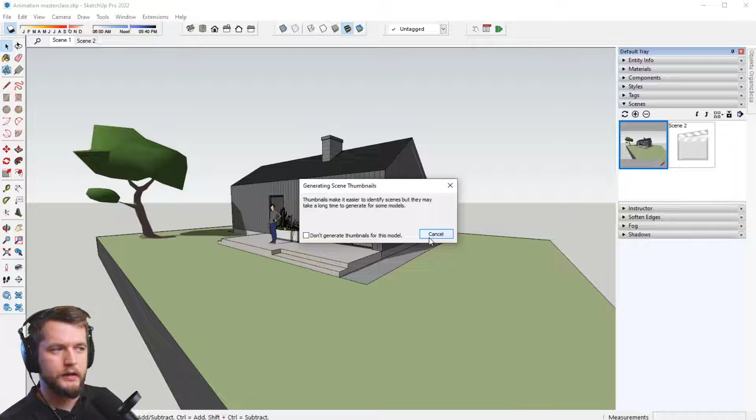What I could also do is change how I see the scenes in this window. By default, you probably should see them as thumbnails, large ones or smaller ones, where it has to update thumbnails. There's also an option to choose smaller thumbnail, detailed view where I can see the scene name as well as the image itself, and also a list view. I prefer this view because it's easier for me to create the scenes and manage them when I don't have to wait every time for the thumbnail to update. But if it's easier for you to understand visually what's inside each scene, then it's better to leave it as a thumbnail.

I'm going to go ahead and create the third scene as well, and let's see they work well. For instance, if I wanted to create a presentation directly inside SketchUp, I could press on scene 1 with right click, and you'll see there's an option play animation. By pressing it, there's going to be a 1 second delay, and then I'm jumping to the next view. At any moment, I can simply press enter or space to pause the animation, and press again to resume it.

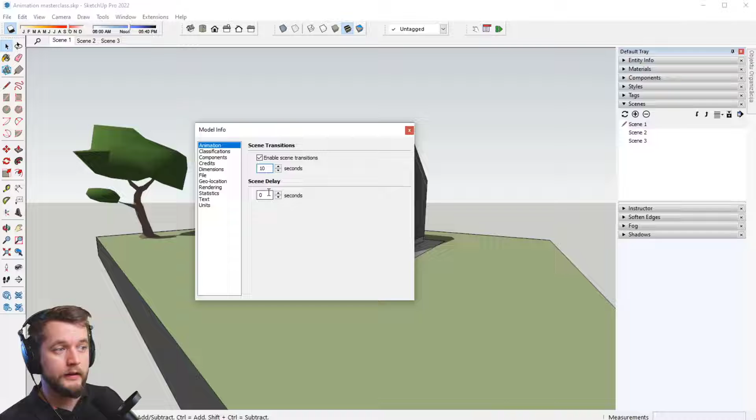To change the timing of the transition between scenes and the delay, you simply go to Window, Model Info, and in the first section, Animation, you'll see these two options. For instance, if I turned off Scene Delay, I wouldn't have delay at all, and I could change the scene transition to, say, 10 seconds. Now if I play the animation, at first you're going to have to wait these 10 seconds to go to the first scene, and then it should start. So now the presentation is a lot slower, not so erratic, and it's easier to view everything in the model.

One problem with presenting directly from SketchUp is that as my model is complex enough, I can't see the shadows while orbiting, because SketchUp usually degrades the visual quality of these stylistic effects so it's easier to model. But for presentation, it's a problem because I want these shadows.

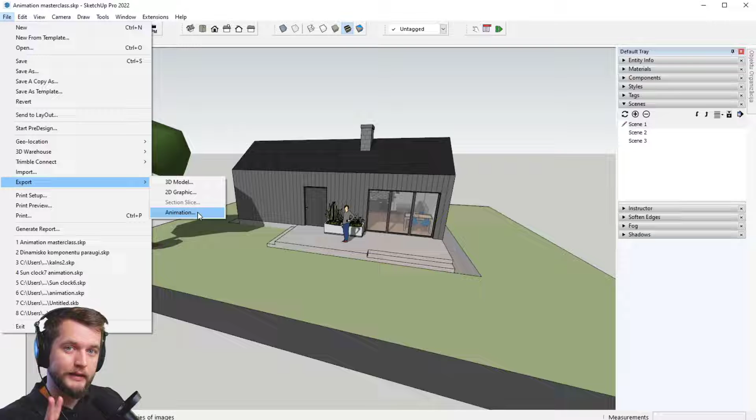So the best thing you could do is save this as an animation by going to File, Export, and choosing Animation. If you have at least 2 scenes, you'll have this option available. I can choose where to save it, and my only option for video is MP4 format, then choose options to decide the settings.

For instance, I can choose Full HD with this aspect ratio, and there's another option for scale multiply. It's how thick all the lines or text in your drawing are going to be, and 30 frames per second. This would be kind of a standard animation, basically as big as my screen is.

I can actually preview it by pressing on preview frame size, and it's gonna appear like that. Also for different sizes, you could just choose 720p, or custom if you wanted to write in, for instance, 4K quality animations.

But for the competition itself, it's enough to choose Full HD, and these seconds could be okay. There's also an option to loop to starting scene, meaning that from the last scene, the view returns to the first one, so you could loop the animation without an interruption at the end.

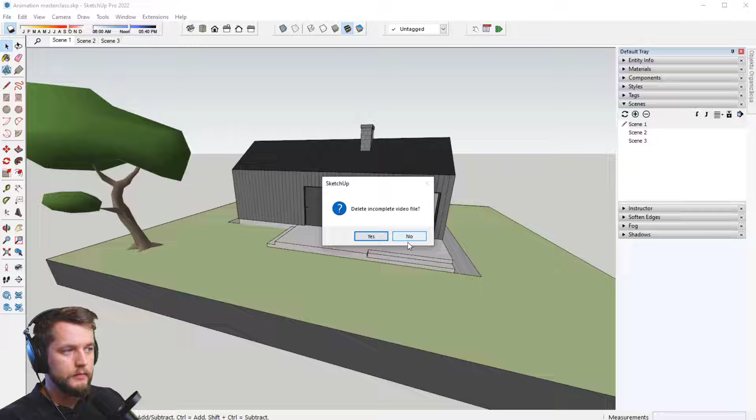I'm going to close this export window for now. A few tips at least for these simple camera animations: it's usually best to follow some rules that also apply for architectural video taking and drone photography, which is that you need to keep the animation's movement as simple as possible, so you could better focus on the objects themselves.

First I'm going to change the transition time to something like 3 seconds again. What I mean about simplifying the animation is, for instance, I could have a view where my camera is looking directly at this facade, and I could simply move from one side to the other. One problem is that simply by creating scenes, I won't be able to have them at the same height from this base.

So when you want to create more interesting animations, you will have to draw some extra lines for them. I'm going to take the line tool and draw a line from this corner up at a height of 1700 millimeters, and the same at other corners of the base as well. Also change the field of view by selecting the zoom tool to, I'd say, 60 degrees.

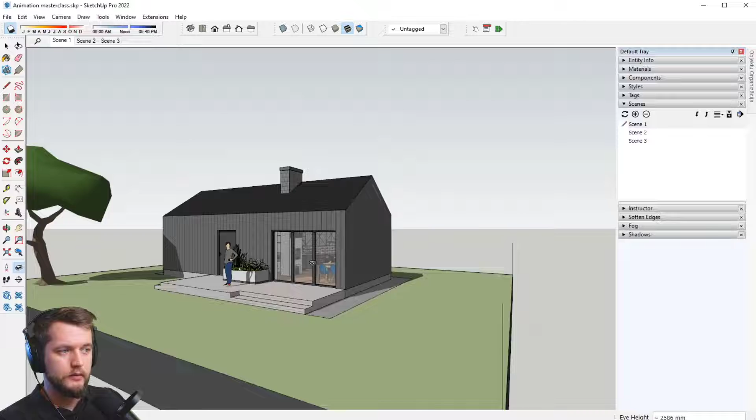And I'm going to create the first view. That's done by using the position camera tool. The trick is I must not simply click somewhere on the base, but use this tool and create this drag motion from this endpoint to this one. With this line, I'm drawing the view I want, the camera position and the camera target. Now I'm simply going to update the first scene like this.

For the second one, I'll do the same: choosing position camera, drawing this line, and updating scene 2. So what I get out of it is that I can press from scene 1 to scene 2, and I get this very precise movement from left to right.

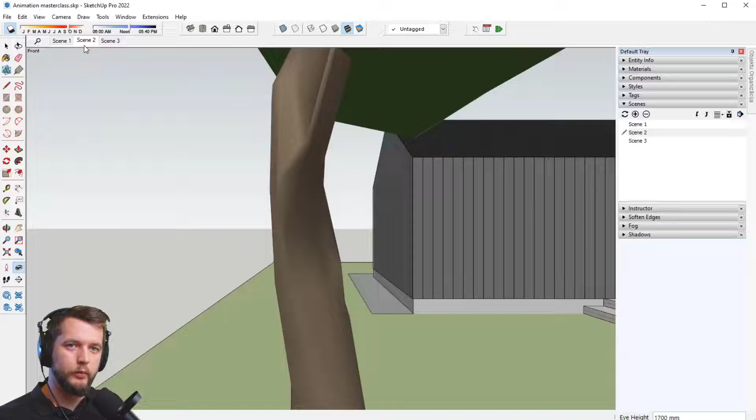Another option would be to create this movement diagonally. Choose position camera again, this time drawing a diagonal line, and I'm going to update scene 3.

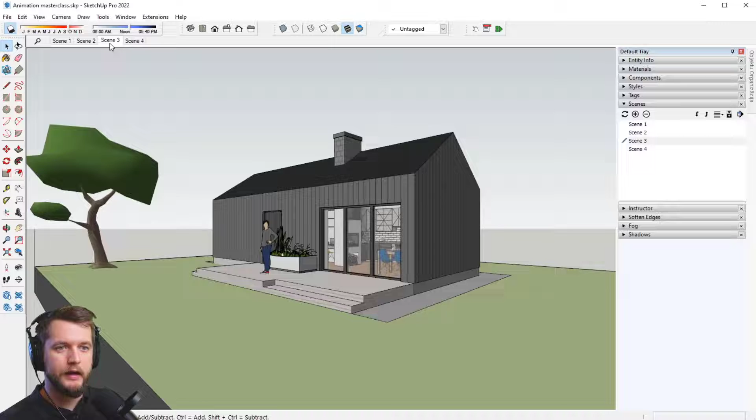I'm at that scene, and I'm going to create another one from the opposite side, from here to here, and create it as scene number 4. To check what I got out of it, going from 4 to 3, I have this precise rotational movement around my house. The good thing is that with this I also get a precise 2-point perspective, which compositionally just looks better as well.

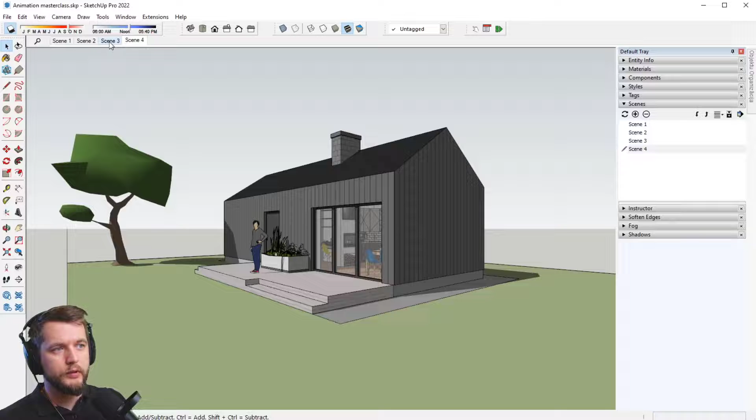That's the main idea, I guess. When creating these combined videos, it would simply be to exclude the part that is from scene 2 to scene 3. You can simply cut that out and combine the scenes together later on.

One extra thing: I could, if wanted, start excluding some scenes from the animation as well. In the scenes dialog window, I can turn on extra details, and for instance, if I wanted to create simply an animation from scene 1 to scene 2, you'll see that for each of the scenes, I can turn off this checkbox, include in animation.

All right, if I would try to save a quick animation now, I'll reduce the resolution and leave it at 30 frames per second.

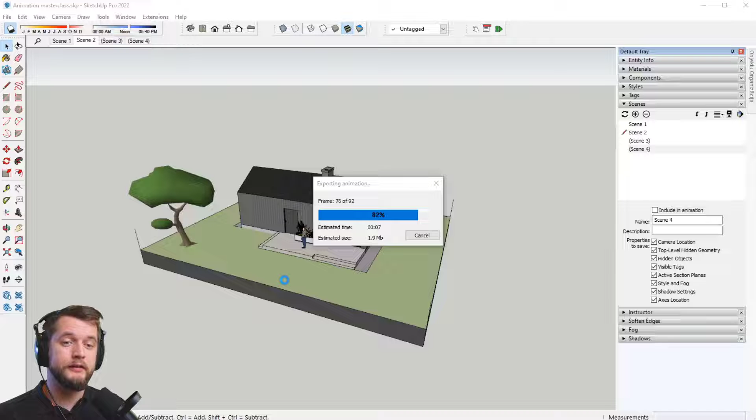If you're exporting very high quality animations, it might actually take an hour. For instance, for 4K quality image videos, each frame is basically a separate image, so it might take a second or a few to actually render.

So if I check this animation now, it's quite too fast, but at least I can see all the detail. Also, the shadows didn't disappear. I could now change the frame rate and the animation time to say 10 seconds, and it should look okay.

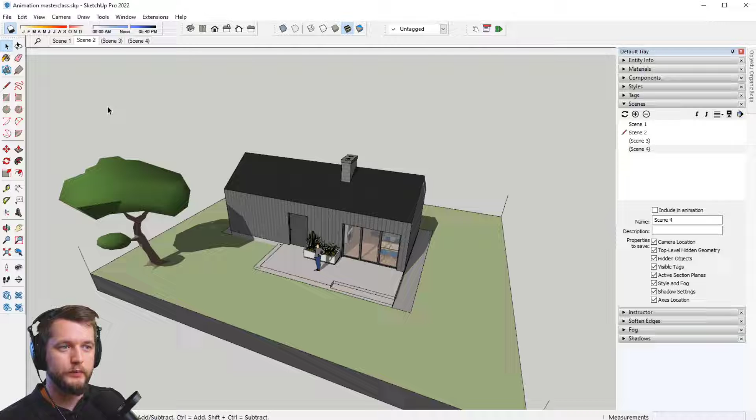So just keep the animation simple, moving in one axis at a time, or limiting the movement to rotation, for instance from left to right, or up to down, or maybe in two axes. You have to have a precise center point where you're pointing at, always for the camera target.

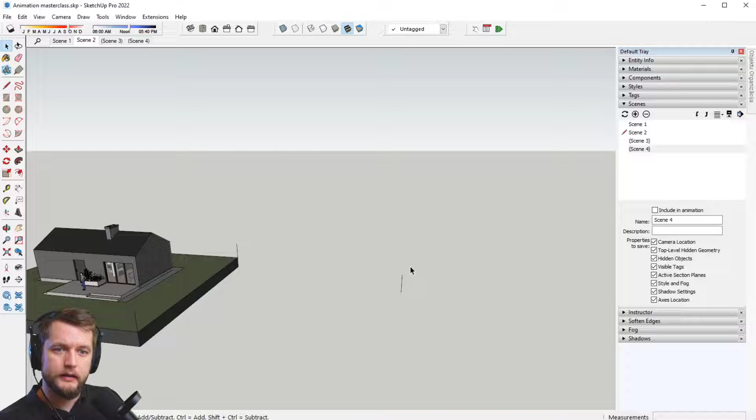For animations that need a bit more precision, like this rotation around an object, it would be useful to draw one line. That's going to be the center line, let me draw it straight up. Then I could draw another, and using the rotate tool, I'm going to rotate it, say to 60 degrees, and press 5x to copy it around.

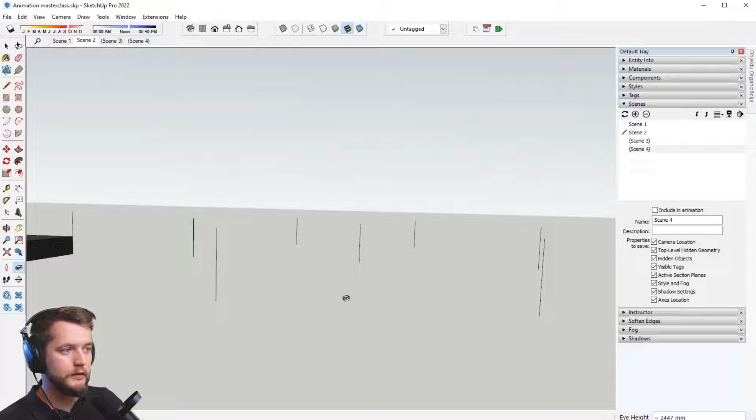So for at least for my experiments, 6 is optimal to get this perfect motion around an object. Each scene would simply be set with the target pointing towards the center. And I could even angle it if the camera is too close to the object, to get a better view as well.

All right, that's kind of for basic animations, but you'll see that there are other things included that we can animate with the scenes. So I'm gonna revert the file to its beginnings.

And now we're gonna see the power of SketchUp scenes. Why it's quite often used in many architectural project presentations, as the project itself might often be constructed in SketchUp, in Revit, in AutoCAD, and other software, but quite often SketchUp is the place where it is presented, just because of these fantastic scene animation tools.

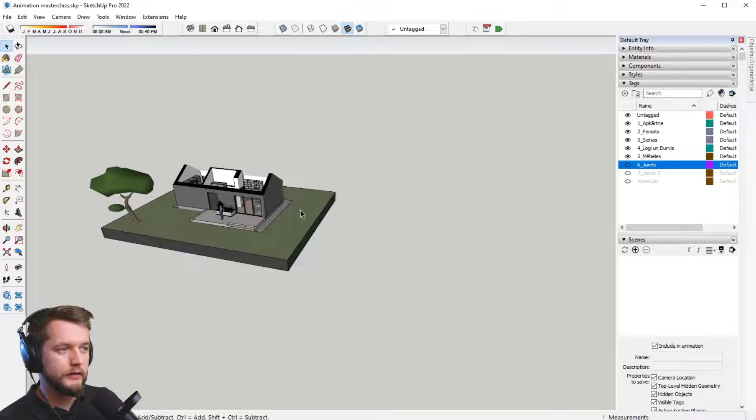So, for instance, if I wanted to first show a few variants of the model, or turn off some elements from my SketchUp model, what I have to do is have the tags dialog window active, and also scenes. I'm simply gonna move it up so I can clearly see all these things, and now isolate a bit what kind of elements I'm gonna animate with scenes.

For the first four, where we had this basic camera animation, we had basically everything turned on. But right now, the only thing I need is to see the visible tags.

So, for instance, this view where I have basically everything visible, I can save it as a scene, and I can now at least name it as well. I'm gonna name it where I can see full model.

And for the next one, I'm gonna simply turn off the roof tag, instantly create another scene, and call it without roof.

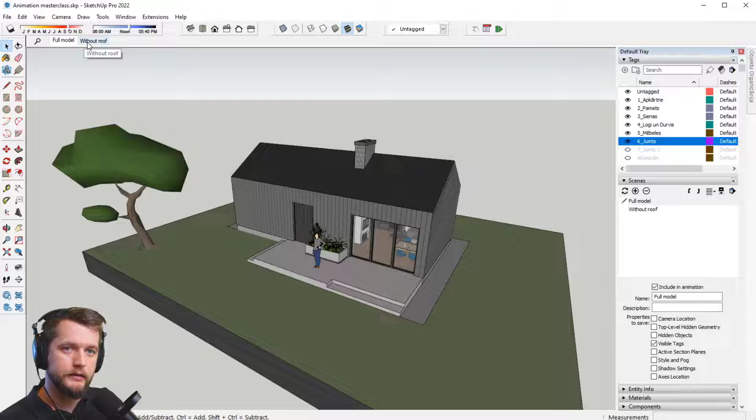And check how it works. So simply by clicking, I can change how the model is gonna behave.

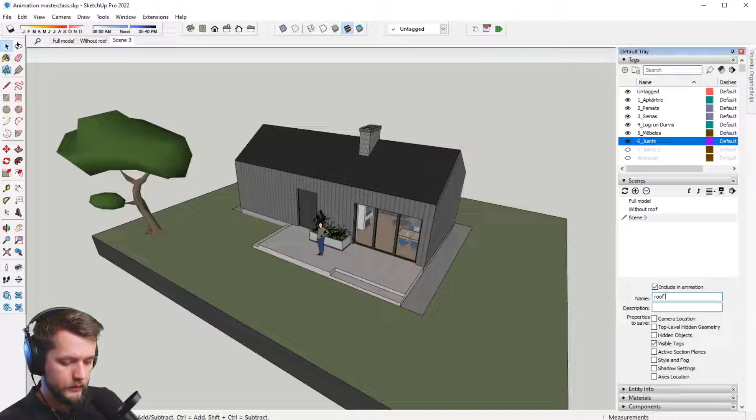So I can also show, for instance, two variants of my design. I'm gonna turn the roof on, save it as another scene, roof version 1, and then we're gonna turn it off, turn on another tag, have a second version of this roof, and save it as a new scene, roof version 2. Right now, simply by clicking on the appropriate scenes, I can change between two variants.

And also, it's very helpful, for instance, if you're presenting from devices like your smartphone or iPad. You don't have to open any of these tags or extra windows, you have just one button that can instantly change your model.

And also, it's useful when sending presentation models to clients, right? When they don't actually have to know how to use any of SketchUp's modeling tools, they can simply check what's written there, or you can communicate with them even remotely, and you can be sure that what you set up with these scenes is precisely what people are going to see.

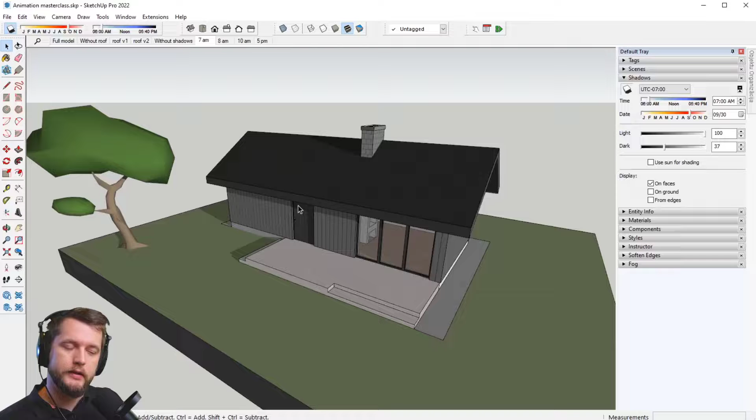For instance, if you save the shadow animation, good settings would be to choose animation, have it set to 3 seconds, and have a 1 second or maybe half a second delay. That would mean I could export the animation using just these shadow scenes, and you'd get a fantastic presentation of how the sundial actually works.

All right, that works okay. After that, I wanted to create another type of shadow scene animation. So I'm going to go into scenes, go to the last one, create a new scene, and exclude all check marks, because this one is going to change how my section planes work in the SketchUp model.

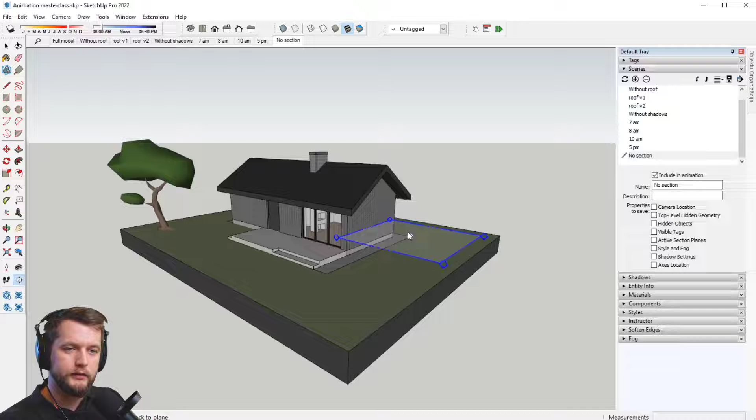The first one is going to be called 'no section,' and for a moment we're going to turn off the shadows. I'll create one section cut and place it horizontally, then move it to the necessary height.

Then I'll create the second section. It's going to be located like this for an elevation, and using the move tool, I'll move it like this. So I have two sections right now.

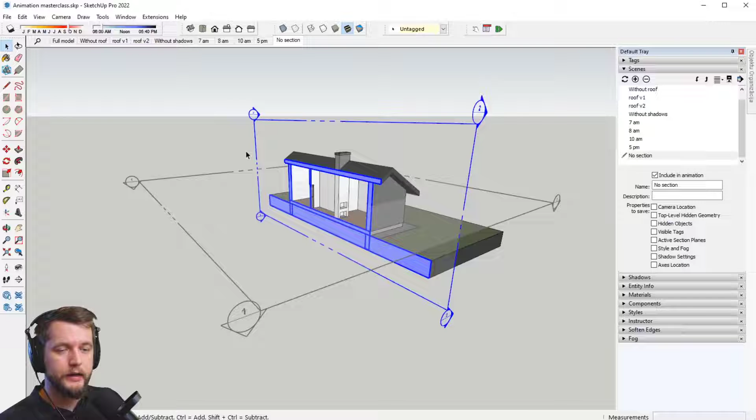To change which is active, I can simply double click on the necessary one. If I double click again on the one that's active, it turns off. So I could basically have three states: sections all not visible, one visible, or the other visible. In this instance, neither of them are visible.

So for this 'no section' scene, I'll turn on the check mark for active section planes. Then I'm going to turn on this section, create a new scene, and name it 'plan.' Then I'll turn on this one, create a new scene, and name it 'elevation.'

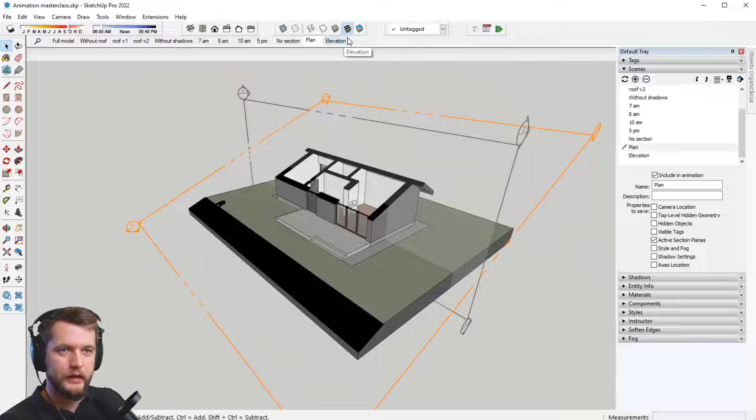I can check how they work now. By jumping from elevation to plan, you also see this very nice section animation. I'm going to go to view and turn off section planes so they won't appear. So every time I press on a given scene, the necessary section turns on in this smooth animation.

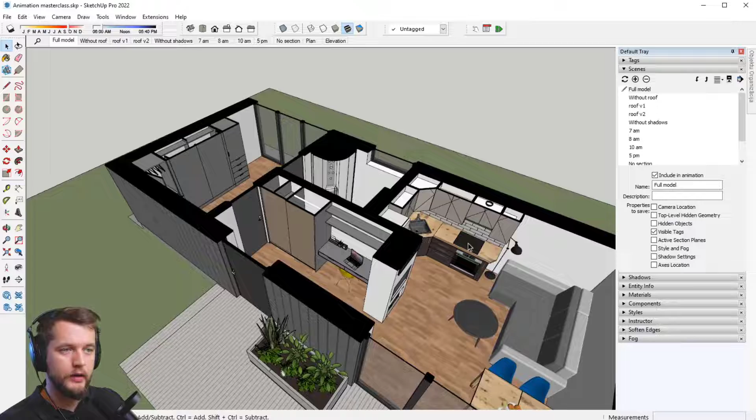For now, all these scenes are not connected. So, for instance, if I turn on the full model scene, I could see everything together. Or go to the elevation view, so I see all the furniture as well.

And I could go back, for instance, to no section, or go to roof variant 1. I don't have a special scene to just turn off furniture, but I'm gonna do this manually. So I can analyze this first design with this kind of roof, to see what the shadow animation looks like from 7 a.m. to 5 p.m. And then I could turn on the second roof variant, again manually turning off the furniture. I guess I could update the scenes simply.

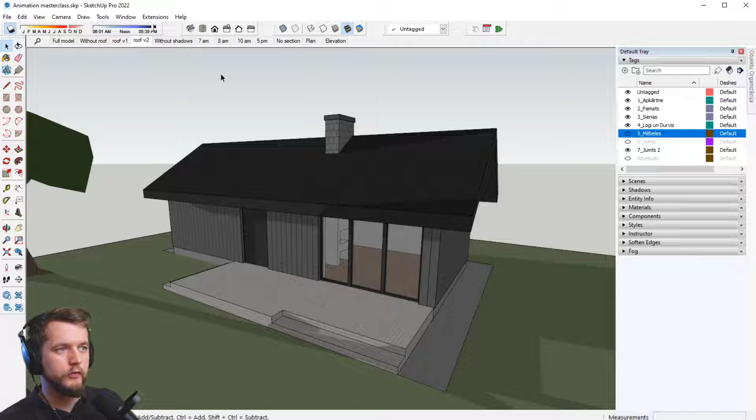Okay, it's gonna be better right now. Roof variant 2, and check the animation again. Sometimes you will have to turn the shadows on and off to get a smooth animation. But if you save it as a video, it should always be viewed in full quality.

So there are also other things you can change with scenes. When exporting as animation, you'll see there's hidden objects, also styles. Simply by going from one scene to another, you could change the style and location of axis, and what kind of geometry is hidden. But for most occasions, I only use camera, section planes, and shadow settings.

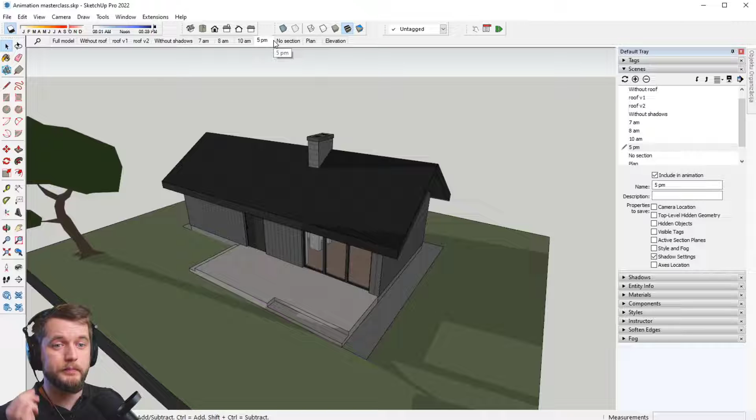You can see that this kind of magic is that I don't have to use any of the dialogues or these toolbars. I can change how the design is presented simply by pressing on these buttons. And this is one way how to animate with scenes. The second type of animation I wanted to show is how I can interactively present some design objects, and for that I'm going to revert to the beginning again.

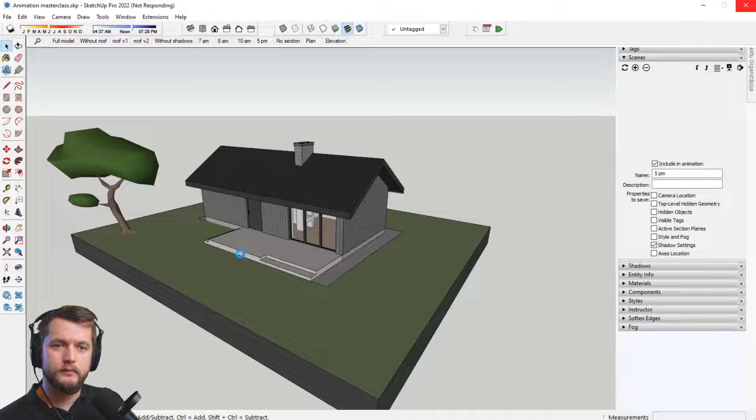Let me turn everything on again. All right, so all that I have open right now is a toolbar called Dynamic Components. You can turn it off by right clicking and turning off Dynamic Components.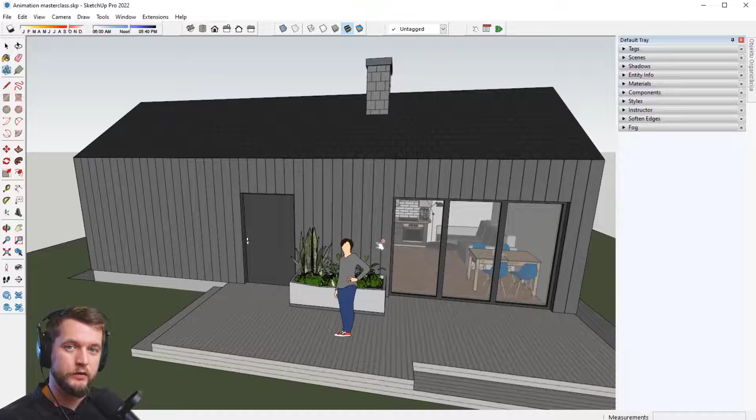What are they? The most useful feature, I guess, is for presentation purposes, where I can use this to press on an object, and for instance open the door, so it's gonna be easier for me to go inside. Then, for instance, I have a wardrobe, and I wanted to show what's inside of it.

Again, I can simply press on the door and show, for instance, this is the place where the shoes are going to be, and that door is animated as well. I can also change the position of some furniture, open drawers, or even change the size of objects from given dimensions.

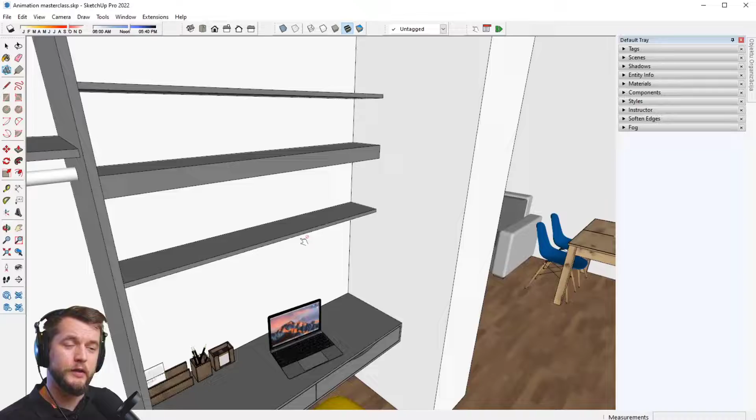Or, for instance, if I have to present how the couch could unfold, first I'm going to press here. I have a hidden feature that I can hide some objects, the pillows. Then I'm going to move this and rotate this part, and voila, I have an unfolded couch. I can press again to go back to the beginning.

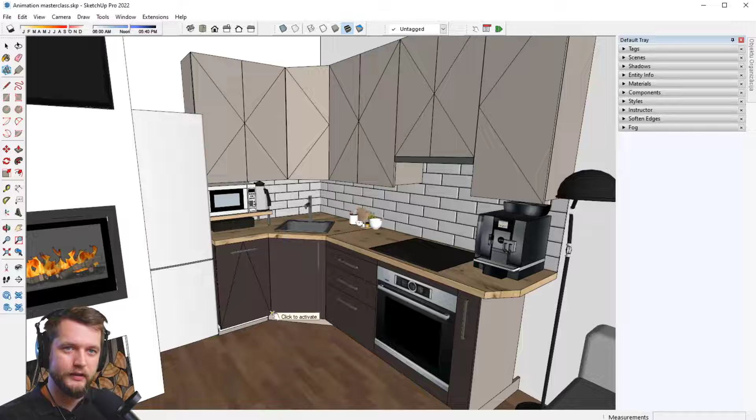It's also very useful for design of some furniture. I can show that here I'm going to have a dishwasher. I can show how I can open the cabinets, where everything is going to be hidden, and simply communicate better your ideas with the designer to clients using these dynamic component tools.

There are other options for parametric modeling and so on, but the basic idea for this class is to show how to create a simple animation for an object's position or its rotation, and also to see what may be the limitations of these dynamic component tools. I'm going to start in a new SketchUp file.

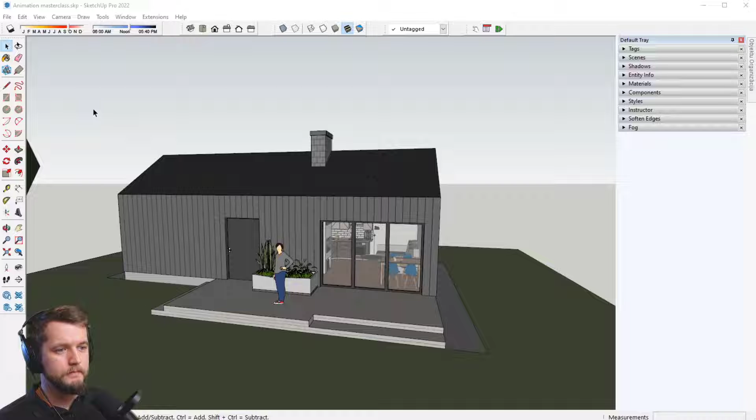All right, and I'll just have some very simple object. For instance, this is going to be a door. I'm going to draw this kind of wardrobe, a very large one. Let me type some dimensions actually, so 2 meters by 600.

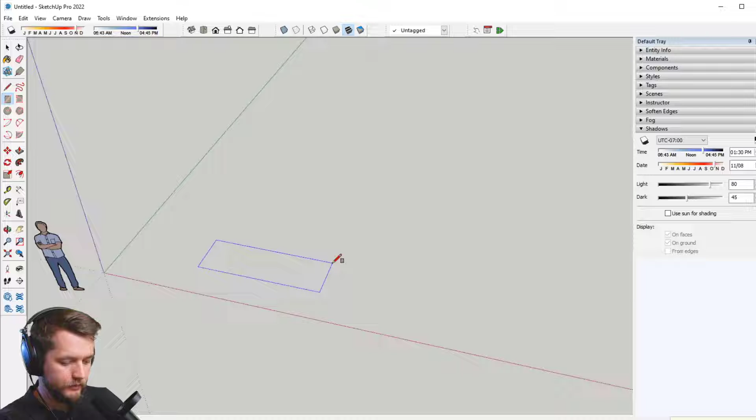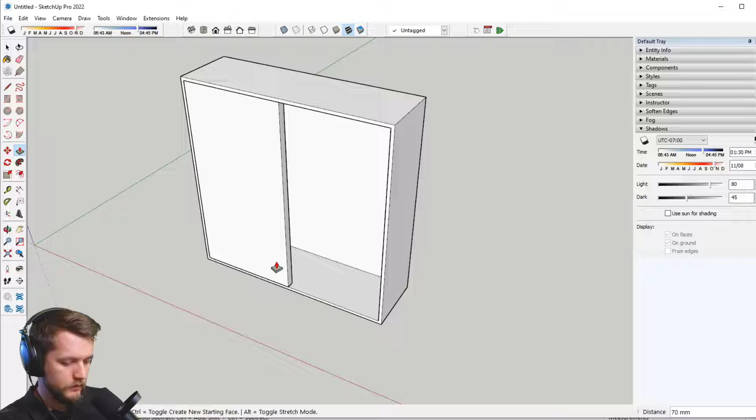I'll push pull it up 2 meters. I'm going to use the offset tool and push pull. This part I'm simply gonna create as a group, and I'm gonna draw a door. I'll use push pull, and I'm gonna save it as a component - a door. So this is the object that I want to animate between, say, two positions.

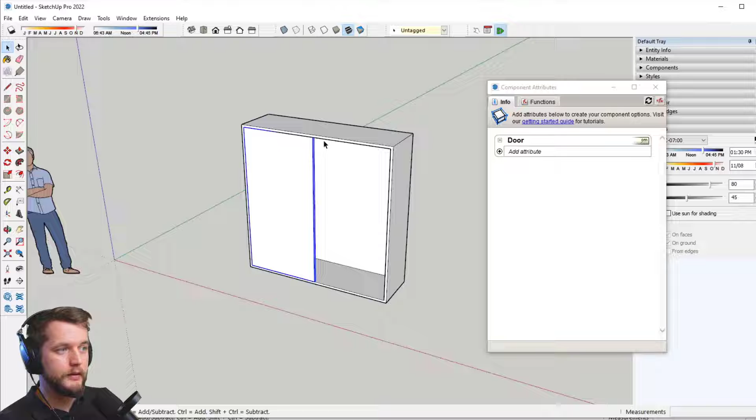So all you have to do is open up the Dynamic Components attribute window. You'll see that for the selected object, I can see what attributes are active. So for the door, I'm going to add an attribute called position in the x-axis. And right now you'll see the position is measured from this point.

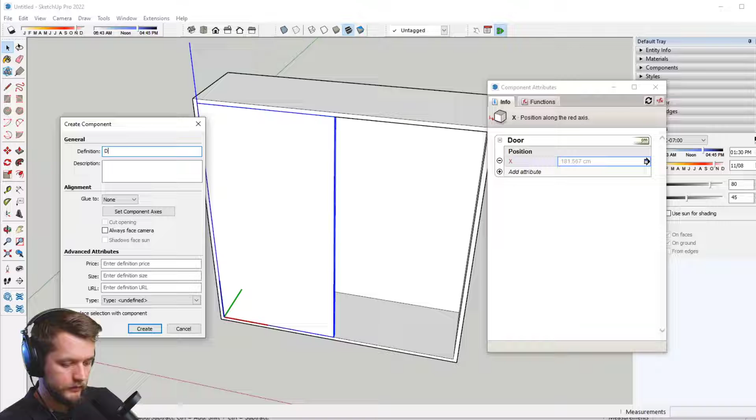But what I would suggest is to draw one simple line at the starting point from this object, and select them together, create them as a component, and call it dynamic door. Right now I can actually go inside of it and delete this line - it's not necessary. The main thing is that doors and these kinds of objects should usually be a two-level group or component. So I have the object that I'm actually gonna animate, and you have this outside container. Right now in this container, at least the position is 0.

It's gonna be a lot easier to do these kinds of animation functions for the object, and I can check how it works. So see the position is 0 right now - I could go inside of it and write 50, and it moved. I'm gonna change it back to 0. And for this upper level component, I need to add two attributes. One is my own attribute, I'm gonna simply name it, for instance, move.

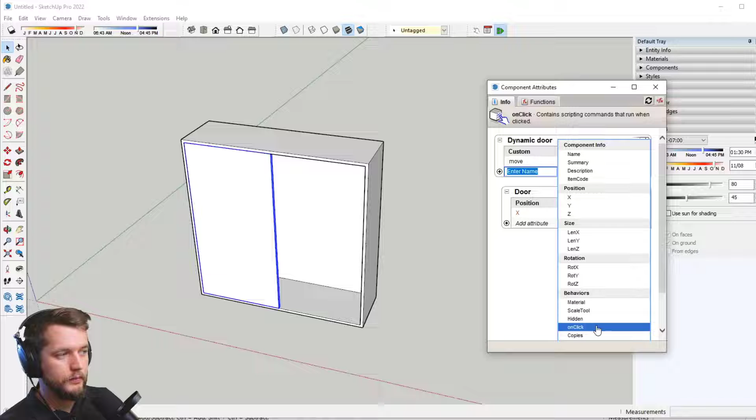And the other one is an on-click behavior attribute that is provided by this component attributes window. Inside of it, I will need to write a simple function. There's a huge list in this section with different kinds of mathematical, trigonometrical, logical, and other functions. But what I need is the on-click function.

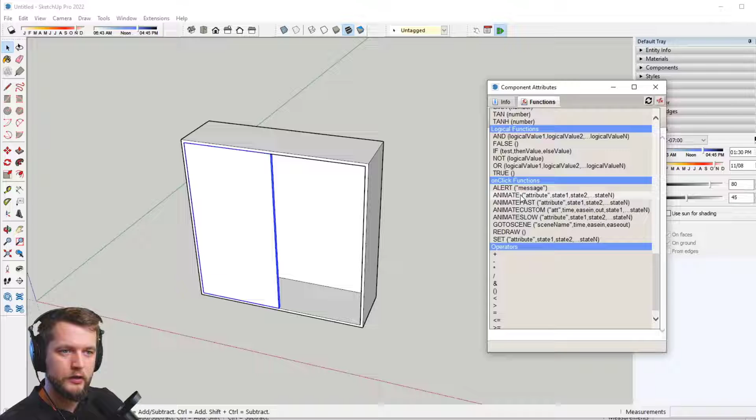So the one I need is animate between a few states. I don't have to necessarily click on it, but if I choose it, I can at least see the syntax of this function. So what I have to write is what kind of positions I'm going to have. It looks like I'll need one position here at 0, and the other one at 97 centimeters. So I'm going to write simply 0 right now.

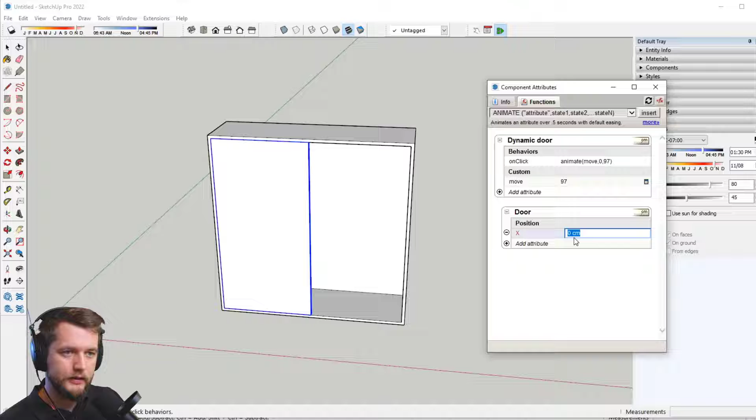And that's it, so let me check. After I wrote this function, I can press on the object, and what I see is that this move attribute is changing. What is not changing is the position of the door, but I can simply link it together by writing equals and pressing on this move attribute on the upper level.

That's basically it - you'll see now when I press on the door, it's animated. And if I write here, instead of animate, write animate slow, then the movement is going to be slower.

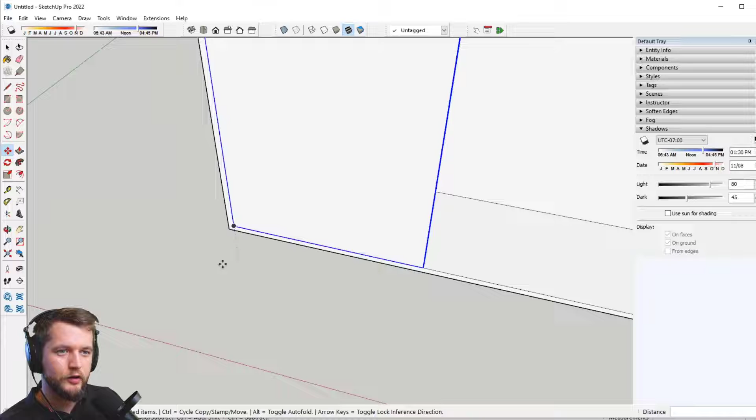And if I wanted to create the second door, I can use it - I'm just going to copy it right here inside. No, I'm going to actually copy it to the same position. I'm going to press on it, and then move it a bit forward. All right, and that should do it.

So now I have these two sliding doors that cover the full wardrobe, and I could simply create a group out of it, and it wouldn't matter if I change the direction by rotating the object, because what was important is that I have the dynamic door component in two levels.

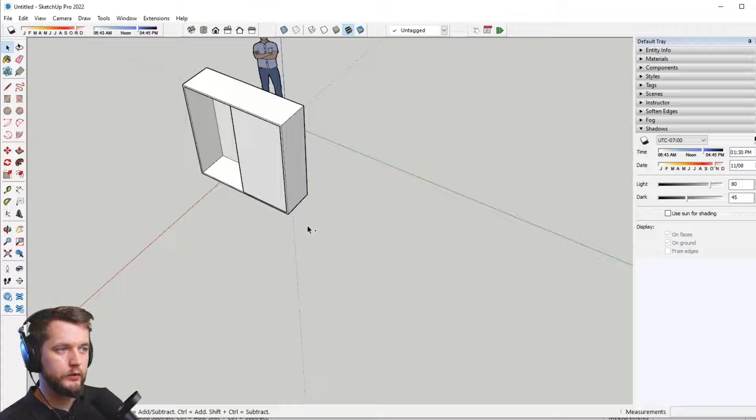And for instance, the other option that I can use is for rotation. Let me create a quick example - I create a cube, make it a component, draw this line again, and combine it into a second component. Dynamic cube - I go inside of it and delete this line.

So I'm going to check the attributes. What I want to animate for this cube, this time I'm going to choose object's rotation in the z-axis, for instance. I'm going to change it to centimeters again. So I write my own attribute - it's going to be called rotation. I'm going to write in 0, and I can already link this together with the attribute, writing equals rotation, enter.

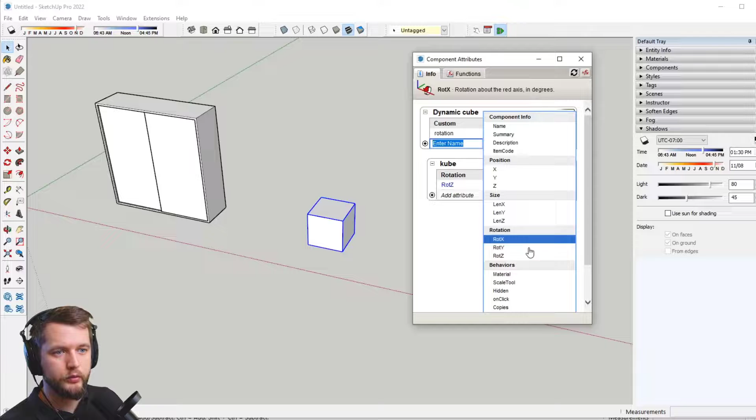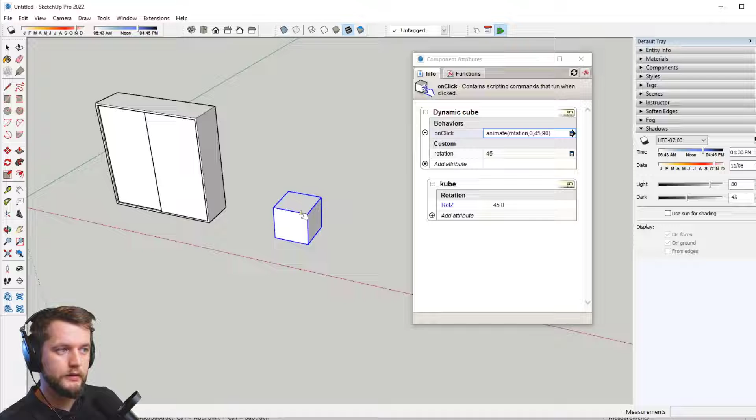All right, and I'm going to add an attribute called on-click again. Inside of it, I'm writing animate, open parenthesis - I'm going to animate rotation, comma, between values 0, comma, say 45 and 90 degrees. Close parenthesis, enter, and that's it. It should already work - you'll see how it rotates around this z-axis.

And for instance, if the object was a bit more narrow, it would simply become a door. So that's that easy.

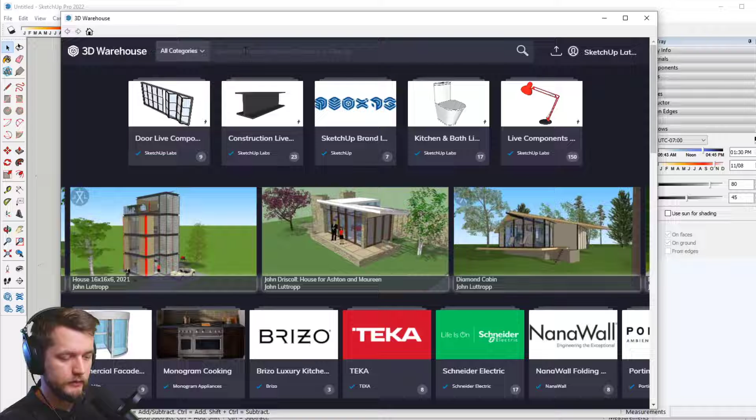What I would suggest is to go to 3D Warehouse and check the many thousands of already available dynamic component examples. For instance, if I write in dynamic door, what's useful is in the advanced section - there's a filter called dynamic components, and only those are going to be shown. So I have different cabinets here. I can also go to the models category - I see simple doors, and for any of these models, you can download them.

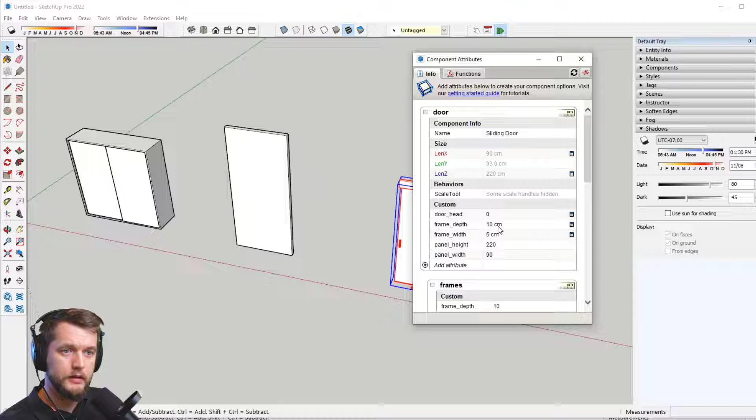And you could open the attribute editor to see exactly how it is made. You'll see it's in different levels, and let's see if there's an animation function - yeah, there is, a simple sliding door. One great problem for dynamic components is limitations, for instance in a rotation axis. So, for instance, in this sofa example, I had this rotation for this part, but if I go inside of it, I want to see the axis.

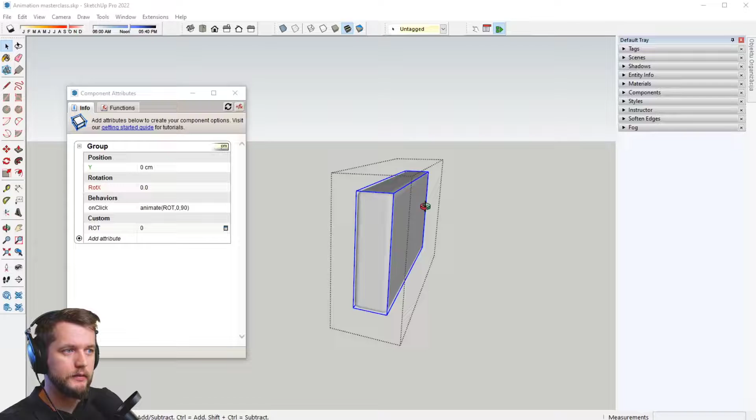So what's happening when animating? There are two things animated: both the rotation and the position of the model slightly. For instance, I can't put the axis at the middle of the object and have it as a rotational point.

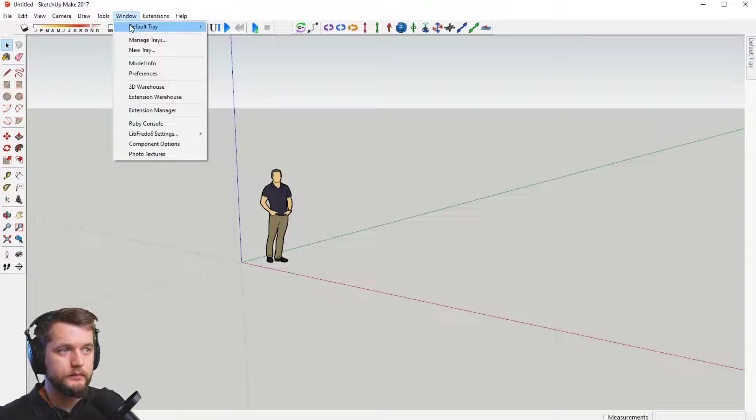In these cases, there are two options. For more advanced animation, one of my favorites is using MS Physics animation tools. For it, you're gonna need an older version of SketchUp, because if you look inside Extension Warehouse, you could install it on SketchUp 2022, but it's not going to work yet. Its developer is still looking at how to adjust it for newer versions. But if you install SketchUp Make 2017 inside Extension Warehouse, you'll see a plugin called MS Physics.

The basic function is that, for instance, I draw a simple base, draw an object, and what I can turn on is the physics play state, where I can start my simulations.

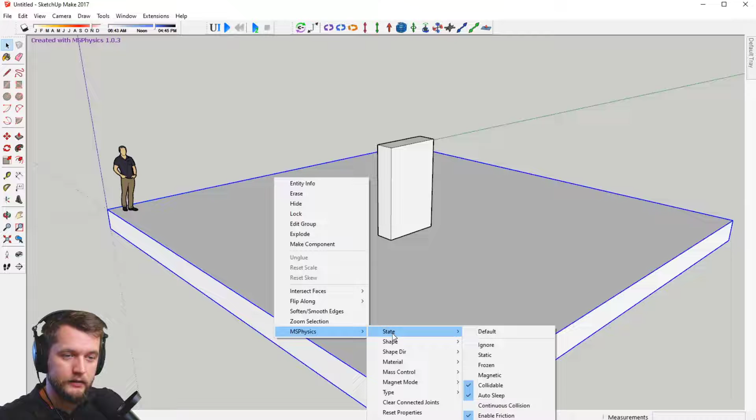I can set this object in its MS Physics state to be static. And if I turn on the animation again, you'll see that my object is not falling to the abyss somewhere. I can keep moving it right like this.

In MS Physics, what's working is both gravitational as well as friction forces. So if I start moving an object, it doesn't continue moving indefinitely. This means you can create a lot more advanced types of simulations, also using forces of elasticity, magnetism, buoyancy.

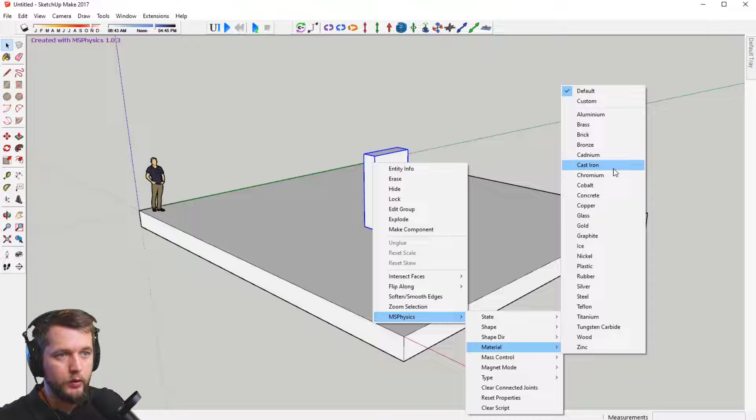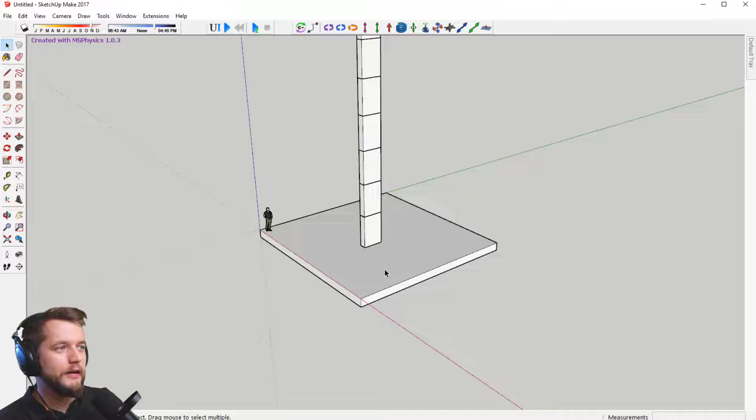For instance, if I chose for this object a different material, say instead of default, I could pick aluminum. Right now, when starting the simulation, it behaves a bit more differently, and it's usually a lot more apparent if you start putting pieces together. For instance, I just copy it 10 times, and if I turn on the simulation, it doesn't move around. But if it had more elasticity, the tower could fall for itself.

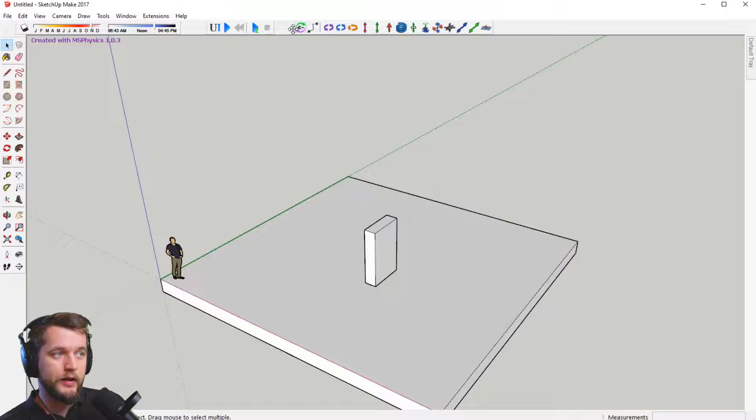For these presentation purposes, MSPhysics would allow you to create very complex mechanical presentations where gravitational and other forces would interact with each other. For instance, I can even add different kinds of gizmos, hinges, motors to the object.

For a demonstration, I'm gonna add... I'm gonna create a slider like this. What I can do is use this tool called the joint connection tool, pressing Shift and connecting this joint to this object. Now if I turn on the simulation, you'll see the object only moves in this specific slider position.

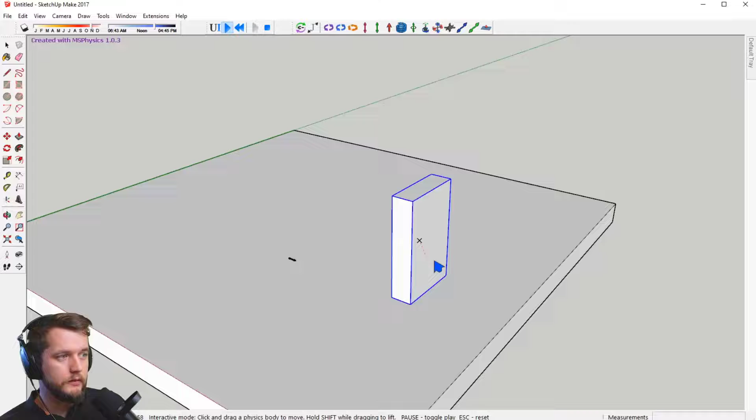To present it a bit more interactively, I can choose this slider. Maybe if I bring this object up a bit, by even a few millimeters, it should move more freely. So friction forces are not interacting with the object anymore, but it keeps going indefinitely.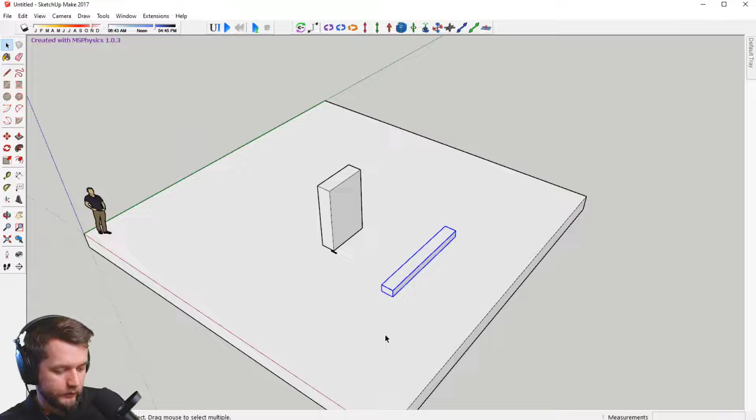So what I can do is just maybe draw a shape. I could change its state to static as well. And if I turn on the simulation again, now it's simply going to bounce around.

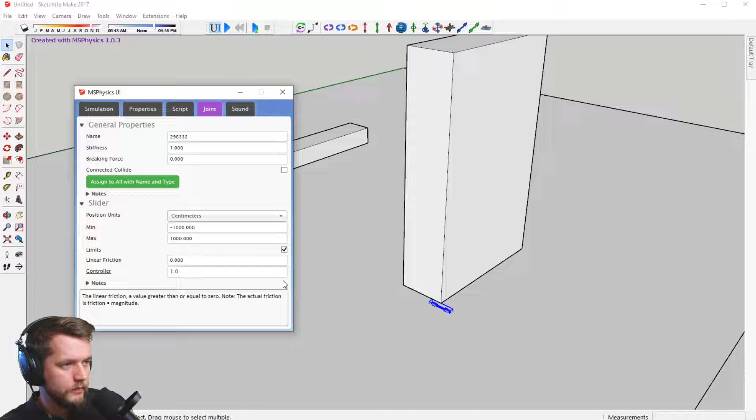So returning, what I can do is select the slider in this UI option. I could add... where was it... a controller to it. So, slider... let me see. It's been some time before I used it. Okay, this function is not working for me right now.

But what I can show is maybe an already created example that's gonna work much better for presentation.

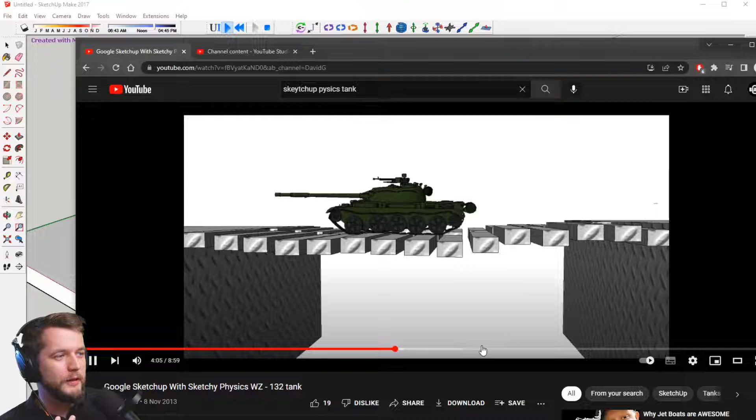If you simply write in YouTube 'Sketchy Physics,' you'll see that people have created very advanced connected objects with sliders. And for instance, it works actually almost as a game. So you can create these tank animations or cars or interactive elements as well.

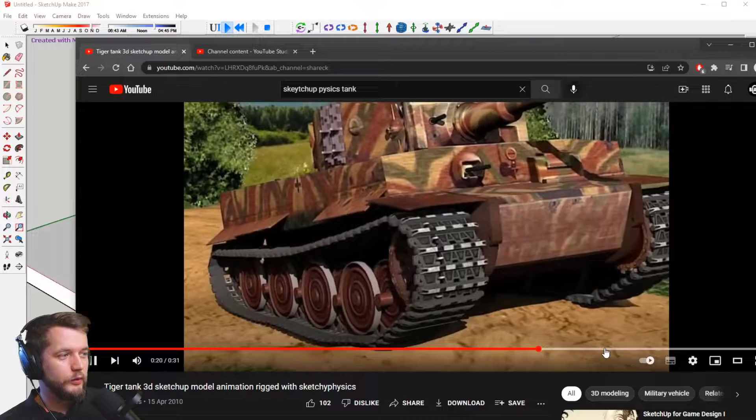And yeah, have fun with it. Actually, that's one option. This was a more advanced one as well. So you have these springs, you have these other elements that connect all the joints, the pieces together, and collisions are working with the ground as well. So you could actually have these moving kinds of parts fully connected, and other options.

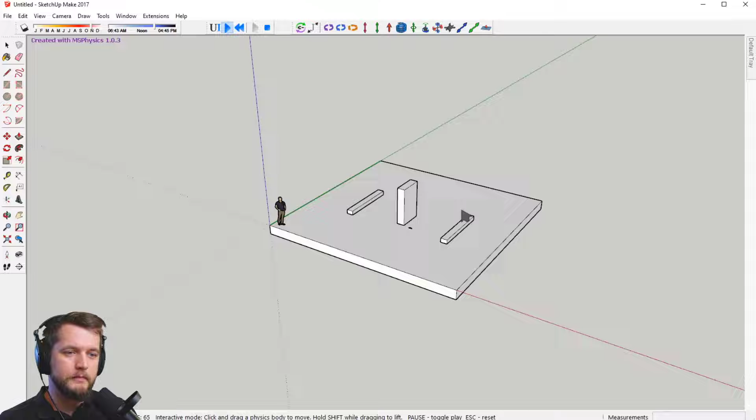The basic principle of how it was rendered out was as a stop motion animation. It's been 13 years since I created this one. There aren't many options to render out these animations with V-Ray, but I guess there were a few other plugins that could handle it.

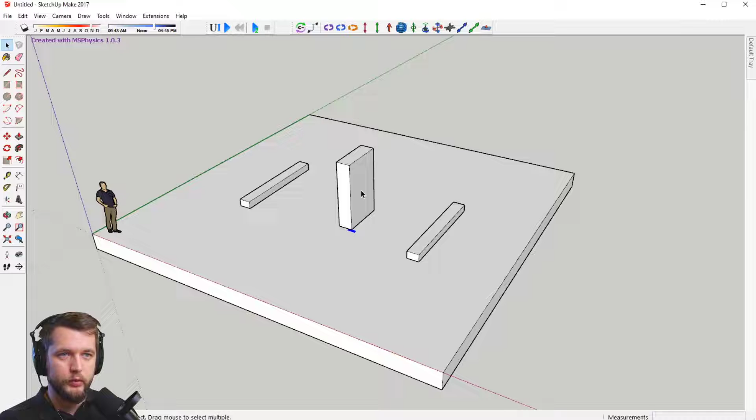What I wanted to add is another option for how you could make a very simple type of animation without using physics or all these fancy things, using a plugin. Let me go to this empty file to present something using scenes.

There's a plugin called Keyframe Animation. It's a paid plugin, but you can test it out for 7 days.

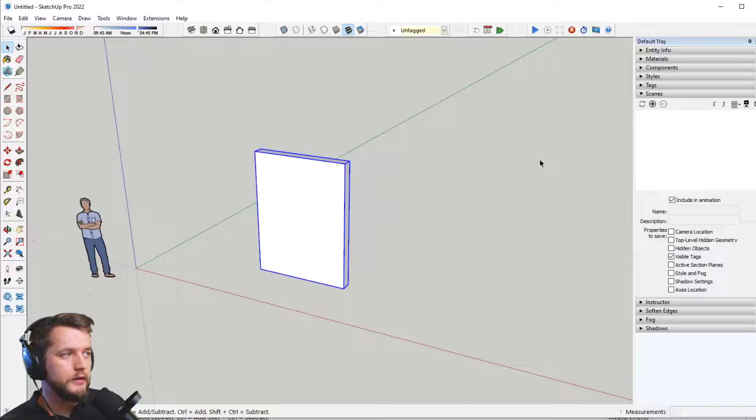How it works: for instance, I'll create a simple object, group it, go to scenes, and I don't really need to have anything on in these shadows options. I'll create one scene and a second scene.

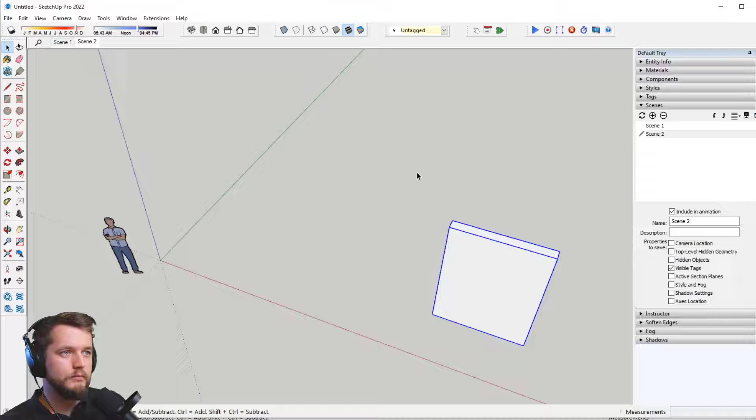What I can do is go to this first scene and turn on record objects. It's going to start recording - my trial is for 7 days. If I have this record option on, I can start animating the object, for instance simply changing its position. Then going to the second scene, I'm going to record it again. If I turn on animate objects, going from first scene to second scene, the object is animated.

That's simple. So in every scene, simply by pressing this record object, it's going to save the state how it is. And it's also going to work for rotation as well.

For instance, I can draw this - maybe I'll draw a polygon to see if it's rotating or not - and make it into a group. Objects should be grouped or created as a component. That's the only basic thing you have to take into account.

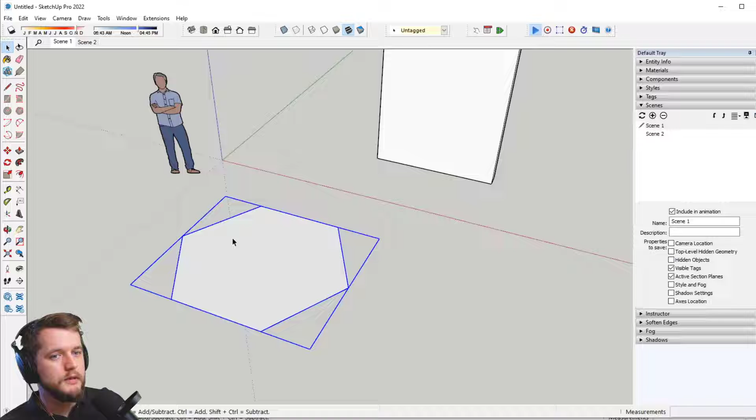So for the first scene, I'm going to record it again. For the second scene, I'm going to use the rotate tool. Where's my center point? Okay, I'm going to rotate it by 90 degrees and press again. Let's see... yes, perfect. I have both of these objects animated.

In the first case, you could do the same thing with dynamic components interactively, but as of now, there's no way to save dynamic components' attributes inside of scenes, so you can't animate something with those. But with keyframe animation, you can.

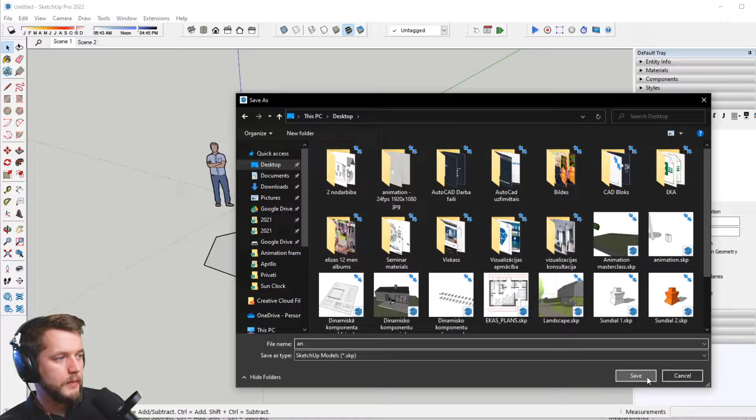Also, what you can do is save it as a video file. For instance, if I chose export animation to video, it requires me to save the model at least. And if I chose export animation as video...

Turn on animation - what I have to choose is the frame rate, the frame size, and the codec. And in the end it's going to create this animation. It's going to take some time to render out because it seems it's not as efficient as directly saving the animation from export options.

But at least you have this object movement inside of SketchUp. I'd say overall this animation is enough for these kinds of mechanical animations - for doors, for other kinds of objects to present inside of SketchUp. The limit definitely inside of SketchUp is some character animation, or combinations with camera animation, character animation and object animation and physics together - you can't do that easily. But if all you have to do is show positions and rotations of objects changing, it's quite enough.

And that's it for now. There's a whole lot of extra things you can learn about dynamic components, MSPhysics, and keyframe animation. I suggest looking at YouTube - there's a whole library of tutorials on how to work with these plugins, but at least I hope you got a good sense of the possibilities.

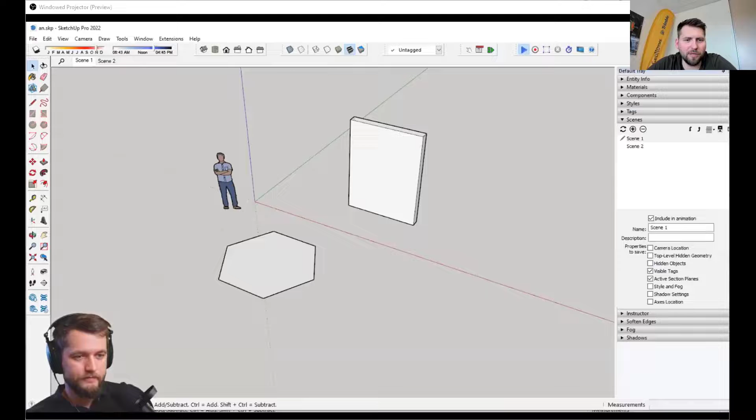Thank you, Carlos. Very interesting presentation about the animation tools and interactive presentations. Today we learned a lot of new things, workarounds and workflows on how to deal with animations and how to make a few of those. As you mentioned, there's the possibility to use dynamic components that could be moved around in the model. Maybe you can stretch out a little bit what is the difference between dynamic components and live components.

Live components are more just for animating - parametric modeling. And dynamic components is something that came up from, I think, SketchUp version 6, and it's more for these interesting presentations, kind of a first iteration that later became live components.